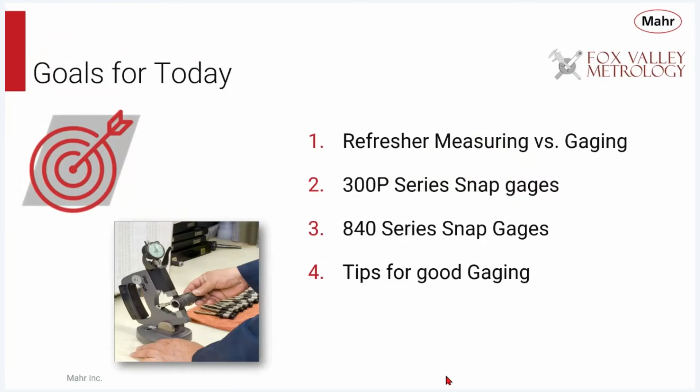So today we're going to have a little refresher about measuring versus gauging, because there is a little difference, and snap gauges are a way of improving your measuring process. And specifically, we're going to talk about the number of different snap gauges that Mahr offers, the 300P series and our 840 series of snap gauges. And then we'll talk about a couple of tips for good gauging.

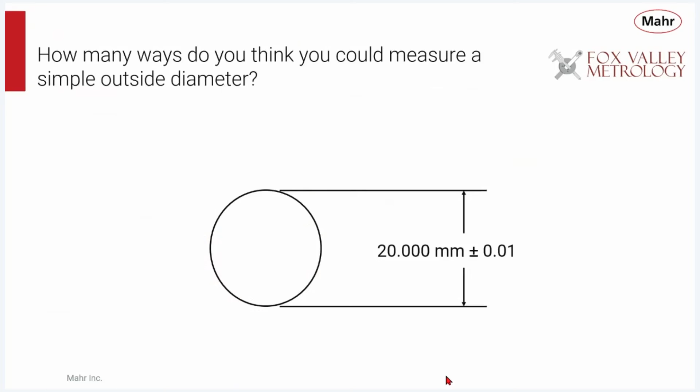Now, when you think about if you have a shaft or a ball, how many ways do you think that you could measure a simple outside diameter? Well, there's probably a ton of them out there. And you can go anywhere from a surface plate with a test indicator, a stand, and a V-block. You can use micrometers or calipers. You might have a special built gauging fixture to do that. You can do it with a snap gauge, a bench ID or OD gauge with adjustable contacts. You can go all the way up to a CMM if you wanted to, or a simple bench stand, probe, and amplifier. Or you can get into a big automatic measuring system to do that.

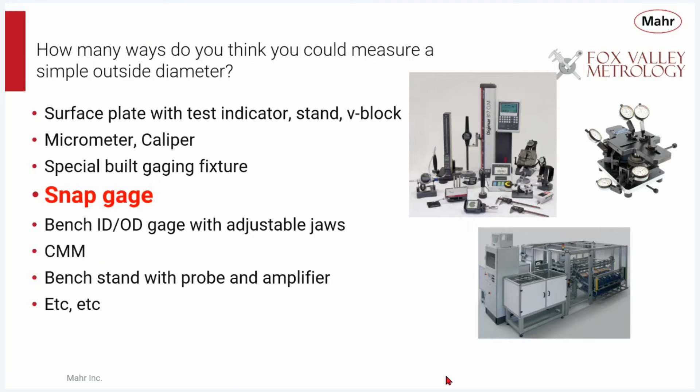But there's lots of different questions that one would ask, and you could probably narrow or funnel your way down to one of these solutions. They're all good, and they're all meant to support a specific application or need. But today we're going to talk about the snap gauge as one of these solutions, because it can be a very viable and useful solution for measuring an OD.

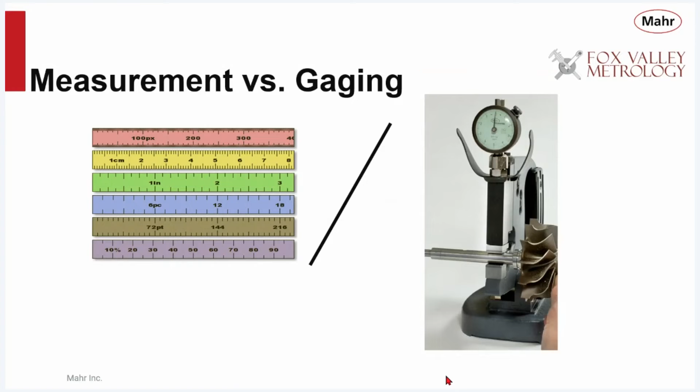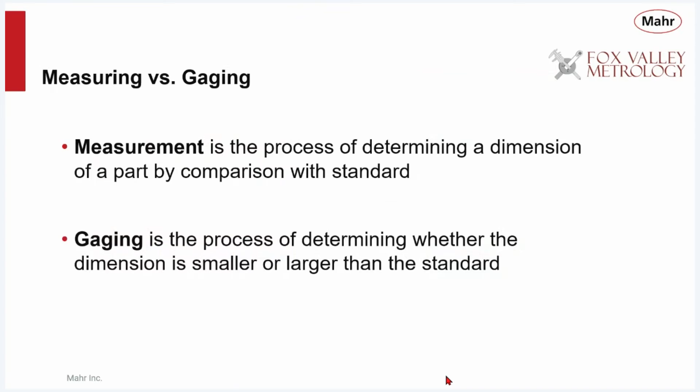Now, myself, just like everybody else, I can say measurement and I can say gauging, and we're kind of saying the same thing, but really there's a difference between those two ways of getting a dimension. So I like to think of measurement as a process of determining a dimension of a part by comparison to a standard, where gauging is the process of determining whether the dimension of the part is larger or smaller than the standard. So there's two different things going on there. One has the reference or the standard built into it, and the other one has the reference or standard external.

So measuring instruments have the standard built into them. Micrometers, scales, and calipers are a system that has the standards built in. They tend to be relatively slow and require more skill for accurate measurements, because you have to align the caliper or align the scale to the part. But with a good operator, you can get some pretty good results. These are variable gauges, or measuring instruments, that have lots of measuring range, lots of versatility, but they tend to be slower and not the most accurate types of measuring instruments out there.

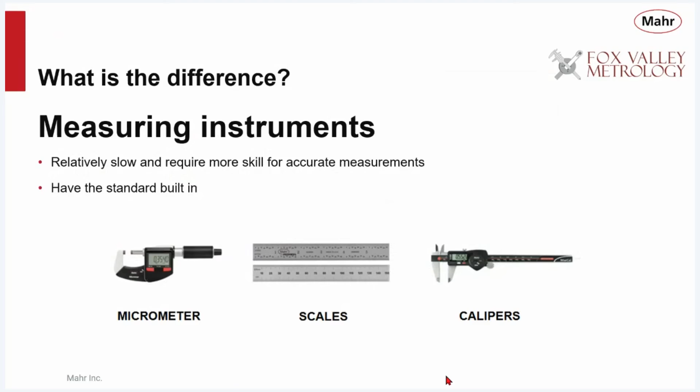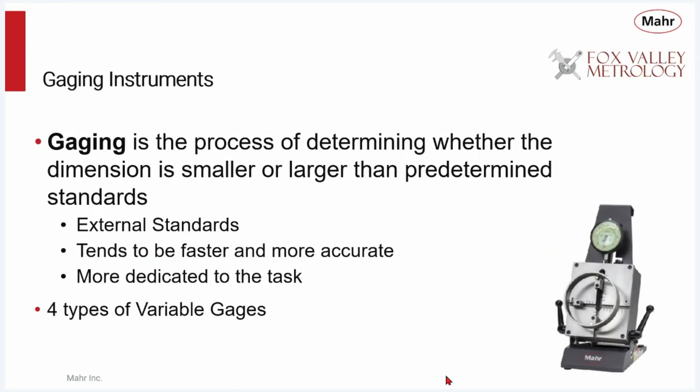Like I said, gauging is the process of determining whether the dimension is smaller or larger than a standard. So these have external standards. They tend to be a lot faster, more accurate, and more dedicated to the task. And there's a subset of variable gauges, and we'll just take a quick look at those.

Fixed gauges, these are made to one dimension. These are our masters, master snap gauges, go/no-go gauges, and so forth. And they just kind of tell you whether the part is good or bad. You don't get any deviations of how good or how bad. You just know that the part is good or bad. There's no information about the part form. It's the fastest process. It's good for one size.

Sometimes there's questions about if you use a little force on that master and make it fit, is that really good or not? So there's some human error with that. It's probably a pretty low initial investment of buying just a master for a part, but you have to maintain that master, store it, get it recertified and so forth, so you can get some added cost over the years. And then usually you'll need two masters, one for the min and one for the max for that size being checked.

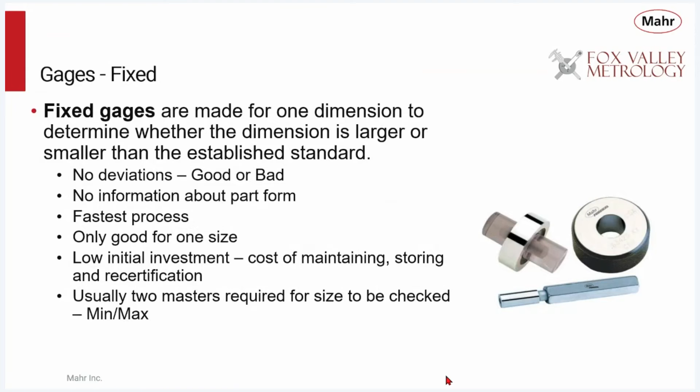But this is what started the Industrial Revolution, these fixed master, fixed gauging systems. Then we move up to adjustable variable gauges, like our adjustable bore gauges and so forth. They can be adjusted to a specific size, but they have a limited measuring range. So now you can actually get and record the actual deviations of the part.

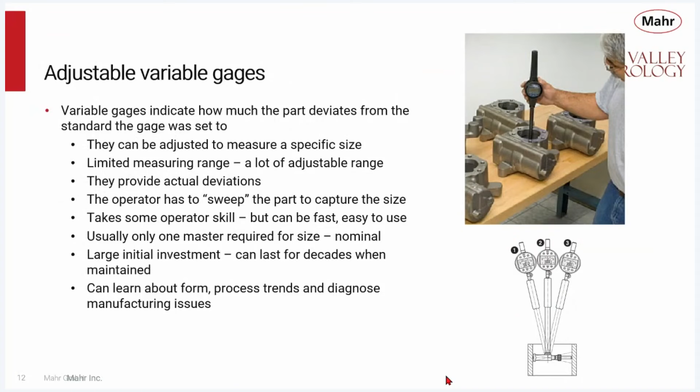But typically, the operator has to sweep the part to capture the size, which takes some operator skill, but with practice and experience, this can be a fast, easy way to measure a whole variety of different parts. You still need a nominal master for each size. It's a little bit larger investment, but these gauges can last for decades when they're maintained. And by using the variable data, you can learn about form, process trends, and diagnose manufacturing issues.

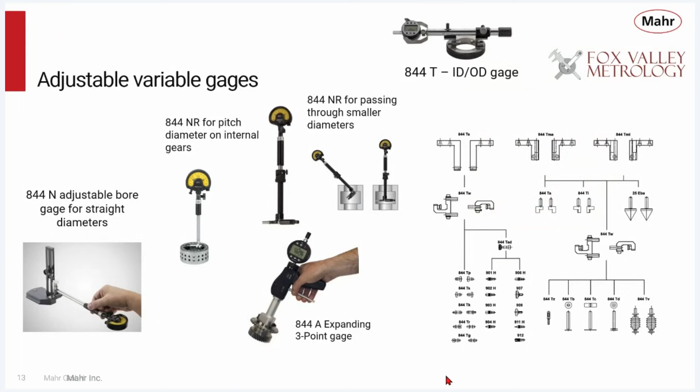And there's a whole family of different types of adjustable variable gauges out there. Adjustable bore gauges, tri-bore gauges, ID/OD measuring gauges. These are all adjustable gauges. You fix them to a specific size, set them against a master, and now we have very limited measuring range to look for the part deviation.

Now you can take that variable gauge and improve it a little bit by adding a backstop to it. So you have an adjustable variable gauge with a reference. These types of gauges with a reference again indicate how much the part deviates from the standard. Again, they're adjusted to a specific size. They incorporate a reference stop to help position or lock the part into a repeatable place for measurement.

Therefore, once you snap that gauge on or lock it in position, it's ready to make that measurement and it'll give you a good repeatable reading. So there's very little operator skill. It's very fast, very easy to use. Again, just like a variable gauge, it has adjustable range, but a very short measuring range, giving you the actual deviations for your process control measurements.

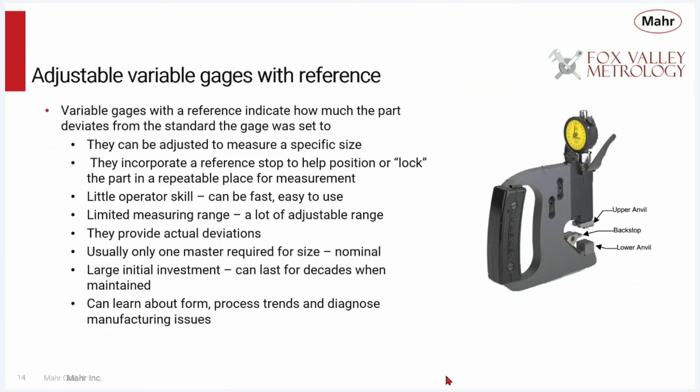You require a master. They're not expensive, but they're an investment that you have to make. And again, using that data, you can learn about the form, process trends, and diagnose manufacturing issues. And there's lots of variable gauges with references. There's snap gauges. There's these bench ID/OD gauges. And any bench stand will also benefit with the use of a backstop for a reference, because it really positions the part in a repeatable position, which greatly improves repeatability of the system.

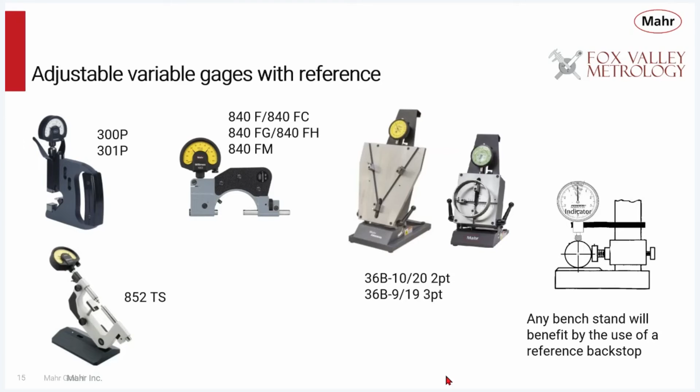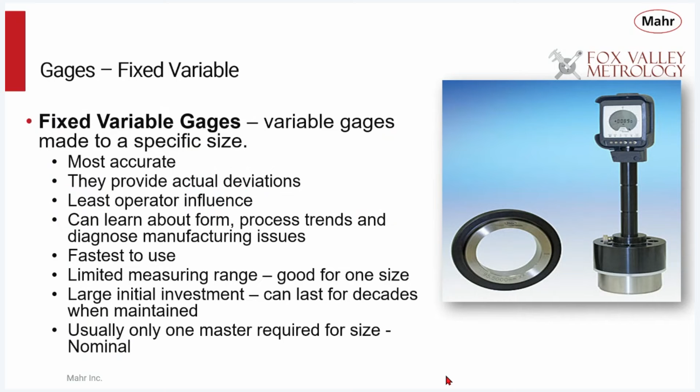But the best type of variable gauge are these fixed variable gauges like air gauging, fixed plug gauging. These are the most accurate. They provide actual deviations, no operator influence. You can learn about the form, process trends, and so forth. They're the fastest and easiest to use with the best performance, but they are limited to one measuring size. So the initial investment is pretty large, but again, these can last a long time, and you need a master for them.

But we're gonna talk today about snap gauges with backstops, and these are variable gauges for most OD applications. They're a step up from other measuring systems, and they're probably the fastest and easiest to use of the variable type gauges. Again, they provide the actual deviations. You can learn about form. They're very easy to use, and I think they're a good value for the investment. For a snap gauge, you need the snap gauge, you need a master, and then you're ready to start making your measurements.

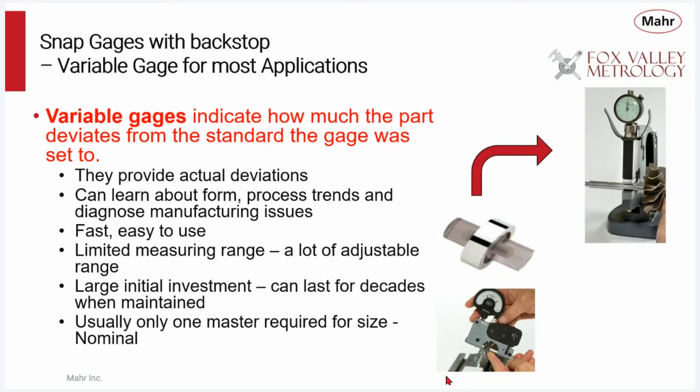With a snap gauge, you set it to a specific size. It's dedicated to that. There's no operator influence. And what do you do? You improve the whole measuring process. Your uncertainty of measurement gets smaller and smaller because you're using a gauge that's more dedicated to the task. So that's the whole purpose of looking at the application, looking at the tolerances, and there's points where you can move along that variable gauge chain to get better performance and value for the gauge. Snap gauges are a step up from normal micrometers out on the shop floor. Faster, easier to use, and better performance.

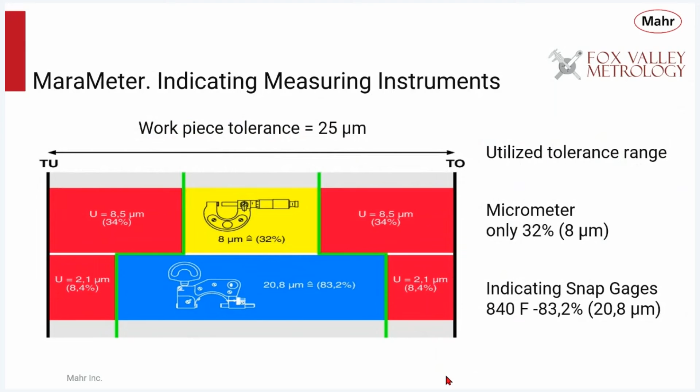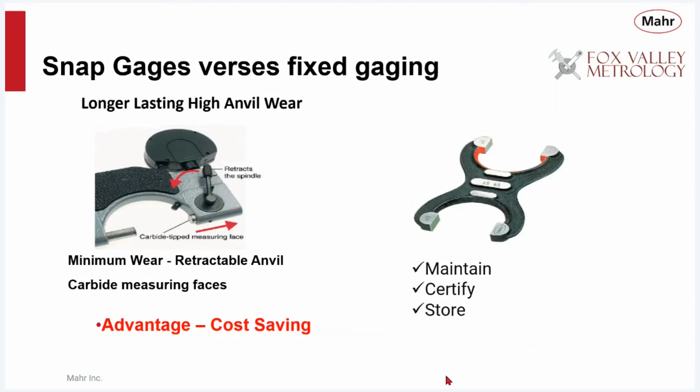Now, Mahr sells a number of different snap gauges.

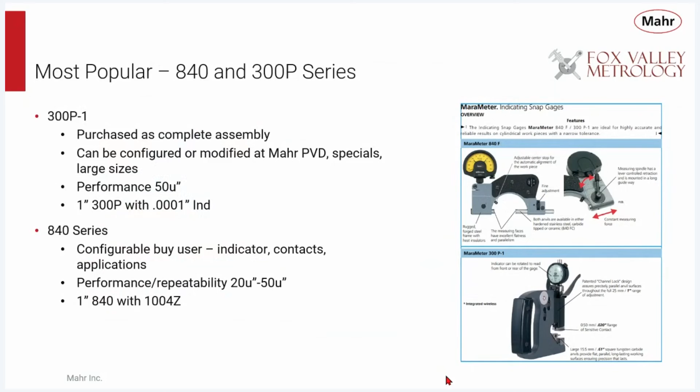Now let's talk about the 300P series for a minute. These have our patented channel lock for anvil parallelism. That's an important part of any snap gauge. You want to make sure that the anvils are parallel, so you don't get any errors by the different size and measuring different areas on the contact. So it's important to have parallel contacts.

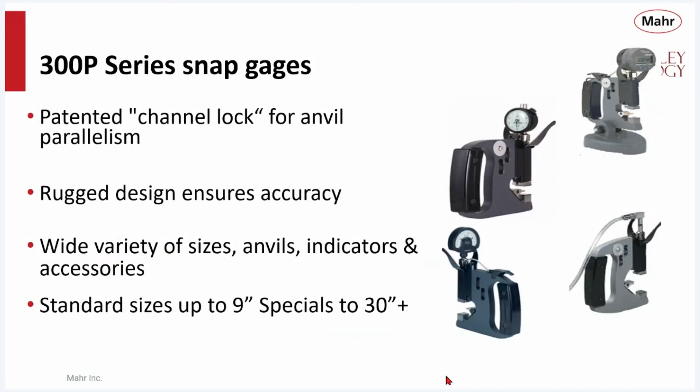These are a very rugged design. Again, these are meant to be used out on the shop floor at the point of manufacture. These come in a variety of sizes, anvils, indicators, and accessories, and standard sizes up to 9 inches, but we've made snap gauges larger than 30 inches if required.

On the 300P series, the lower anvil is an integral part of the frame itself, and the size is set by adjusting the frame itself. The frame part, or the right side of the indicator sensitive contact, all travel as a unit within the channel lock. So as that's moved up and down, and then drawn back into the channel lock, it realigns itself, and we maintain the parallelism.

The anvils are wider than the frame, so we have a large contact area, which helps in reducing wear. It has a big reference anvil in the back, so it can really snap onto the part when we're making measurements. And with all gauges, you want to have some type of heat insulation so that the user doesn't influence the measuring process.

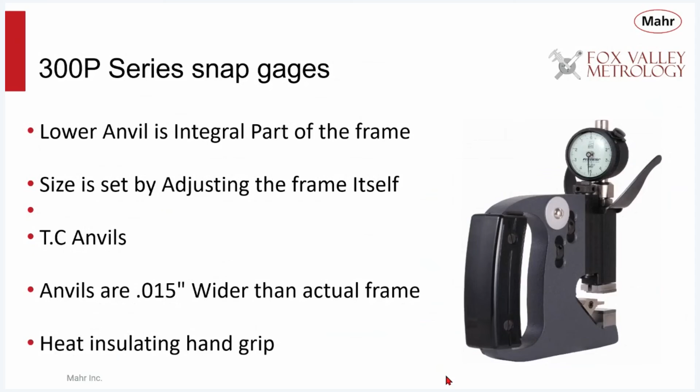And just take a quick look at what a snap gauge consists of. You have a frame. Most gauges look like a C, the letter C. They have a reference contact, a backstop, and a measuring or sensitive contact forming the C. If you look at any gauges, as long as you have those three parts, you're going to have a pretty good measuring system.

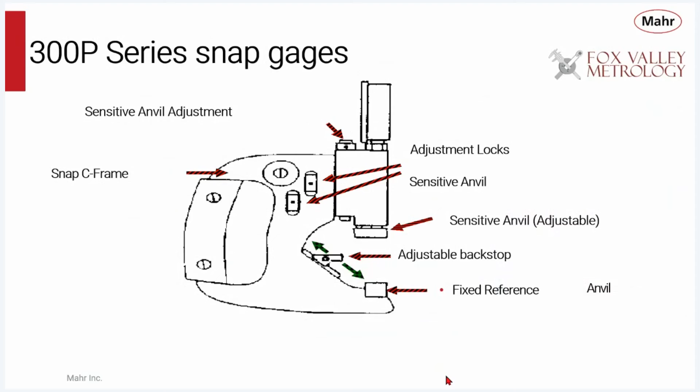But there are adjustments on the snap gauge for moving the sensitive contact up and down, locking it in position. You have an adjustable reference backstop, and you have a fixed reference, which is your measuring anvil. All these anvils are carbide for long wear, again, meant to be used hundreds of thousands of times measuring a part.

These snap gauges can come with dial indicators, digital comparators, digital indicators. We make large special ones, as I noted. So all these gauges are fully adjustable with positive positioning for locking at any point within its measuring range. The sensitive contact has a travel of about 20 thousandths. So most tolerances for this type of gauge are much less than that.

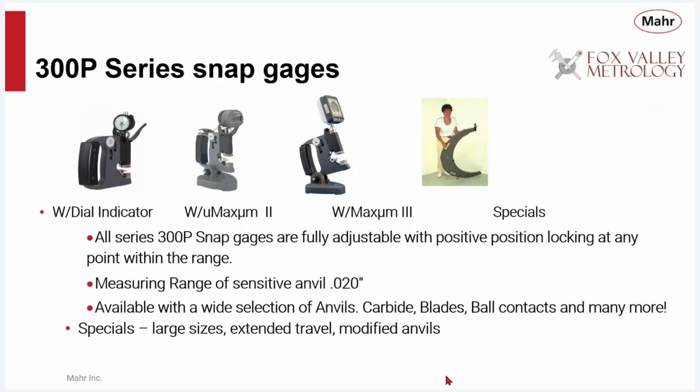And we can get a whole wide selection of anvils, carbide, blade, ball contacts, and more. And specials can include larger sizes, extended travel, and modified anvils.

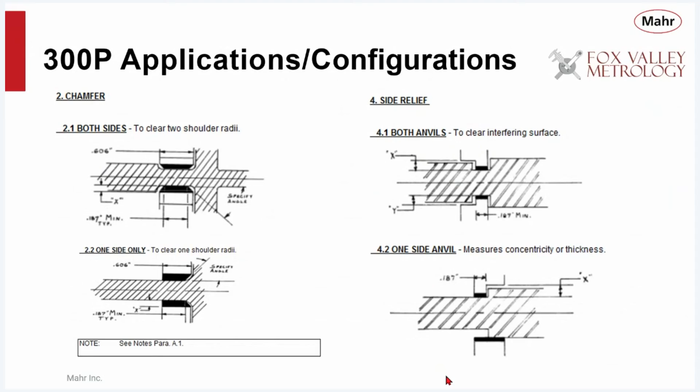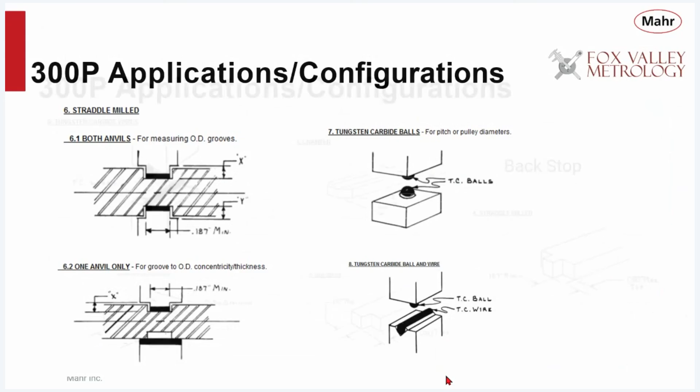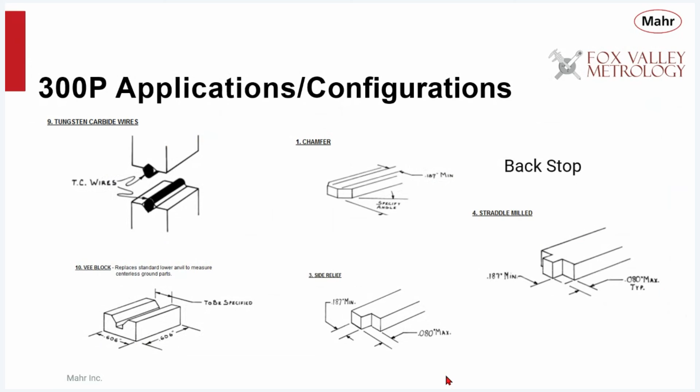We can make narrow anvils. We could put ball contacts. We can make ball or line contacts like cylinder contacts or two-cylinder contacts for doing pitch diameters on certain types of gears and so forth. So lots of capabilities of making custom snap gauges for an application. There's our carbide wires on the left side there. We have special backstops sometimes to align the part. Again, all configurable things from Mahr.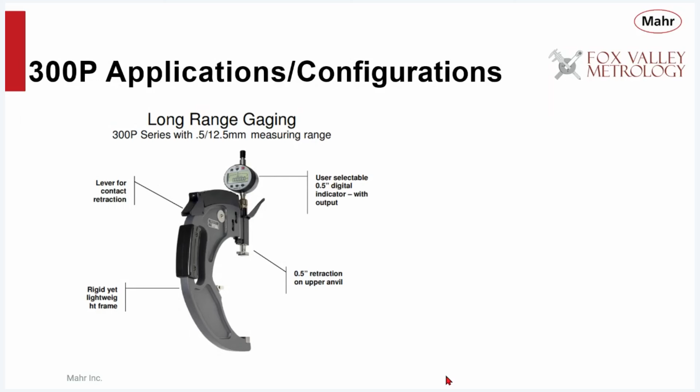We even have snap gauges that have extended range. So if your part has larger tolerances and you want to measure within a half-inch measuring range, we can make snap gauges that have a half-inch retraction, and you can measure anywhere within that half-inch range once the gauge is set to its specific size.

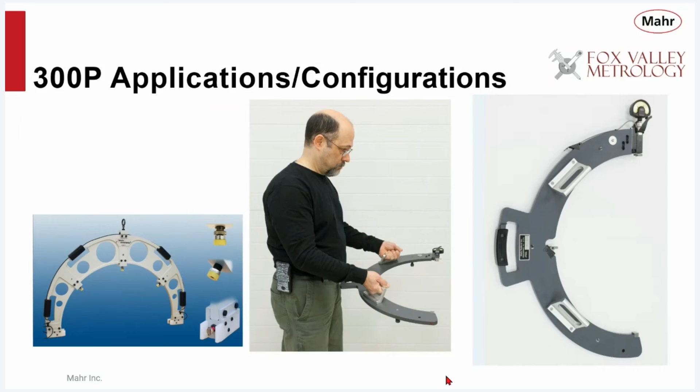And here's an example of some of the larger ones we've done where you can basically get up to 30, 40 inches with a snap gauge. They can be electronic, allowing for large diameter shafts to be measured, or they can be of more portable size with handles to make them easier to use.

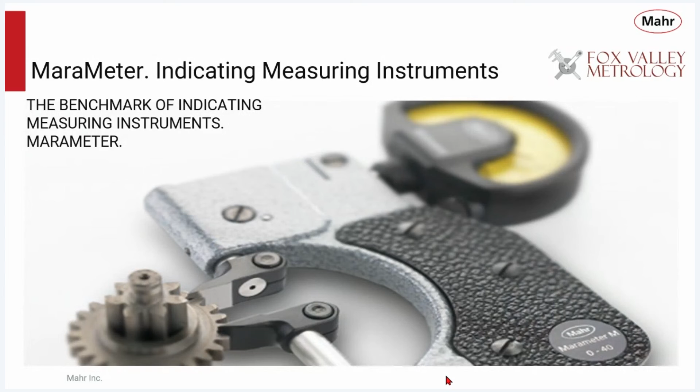So let's take a look at the 840 series. These are the little higher precision snap gauges, and these come in a couple of different series. These are rugged forged steel frames with heat insulators. The measuring spindle is mounted on a long guideway with a lever-controlled retraction. So these have retraction built into them. The anvil spindle or the reference anvil can easily be adjusted with a fine adjustment screw, and these use a constant measuring force because the built-in spring eliminates any user influence.

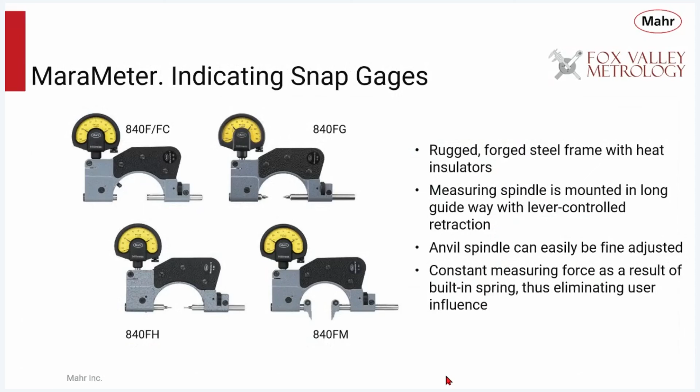So you can see there's 4 different models here being used with dial comparators. And I think dial comparators are a lost art. In terms of comparators, they provide short range but very high resolution, which is a perfect match for a snap gauge. Again, we have lots of variable range but very limited measuring range. So very often people will put a half-inch digital indicator or dial indicator on a gauge like this, when really you only need a couple of thousandths of measuring range within your indicator, and now you can get a higher resolution.

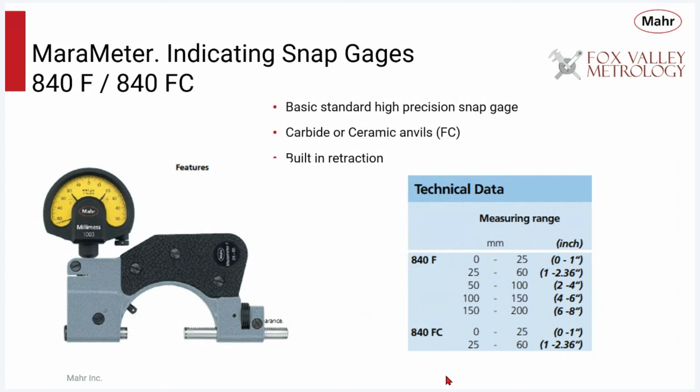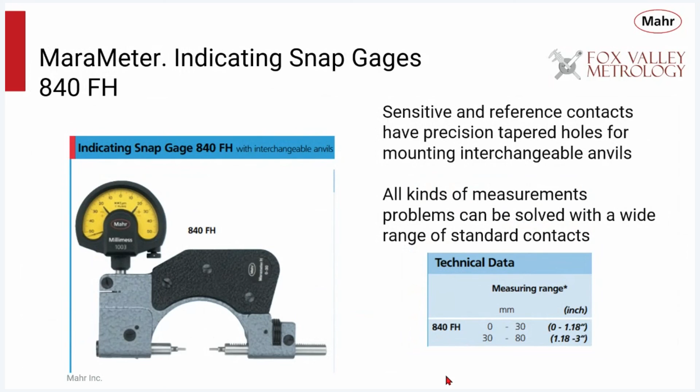And then there's different variations of that. Just like the 300p had different anvils, the 840 series has interchangeable contacts. So you can get some very small anvils. These have a tapered hole in there that mounts these interchangeable anvils, and you can get different sizes, lengths, and so forth, where all kinds of measuring problems can be solved with a standard range of contacts.

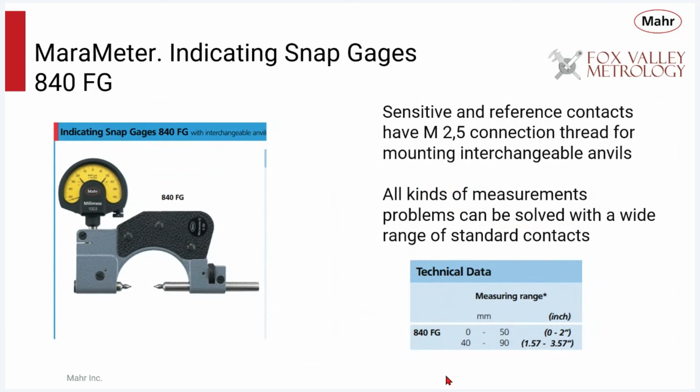Another type of 840 is one that has a screw-in contact. So these have a metric 2.5 connection thread for mounting interchangeable contacts. And again, in this type of gauge, you can use ball contacts or point contacts or special contacts for doing threads and so forth. And you can now make this into a thread measuring system, doing pitch diameters or over thread dimensions.

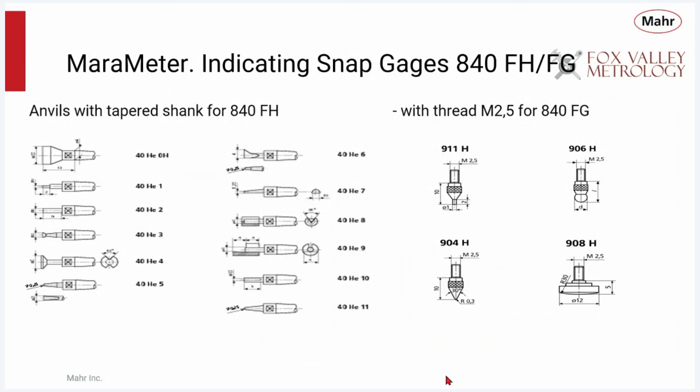And here's just an example of the type of different contacts that you can get. You can get flat contacts, ball contacts, blade contacts, offset contacts. A whole family of different contacts are available to measure grooves or lands or different parts on the OD of maybe a shaft or any part that you have.

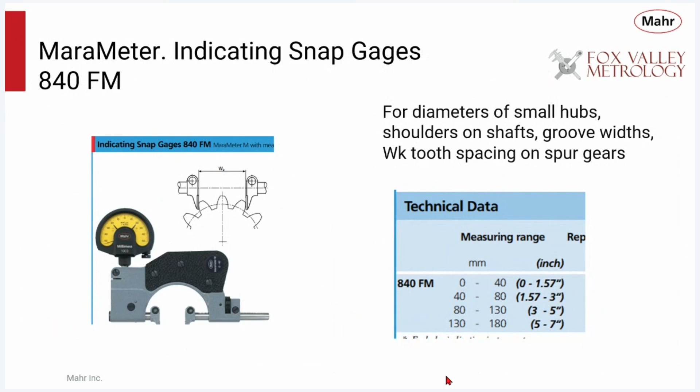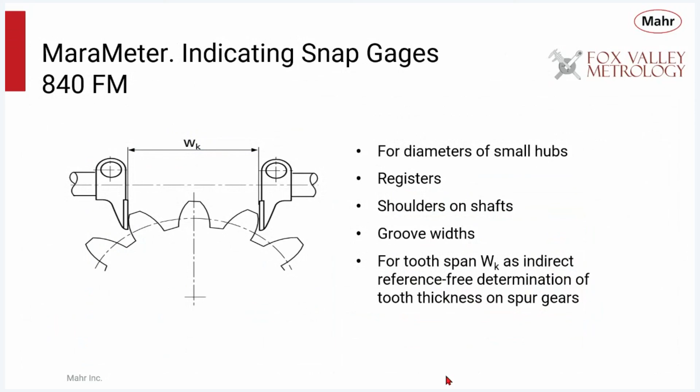We also make a snap gauge that measures the tooth spacing on spur gears. This is very popular in the gear industry, and another application using different contacts on the standard 840 frame to allow you to measure the spacing of gear teeth. So basically what this measures, this is the WK format of measuring tooth spacing. It's for diameters of small hubs, shoulders on shafts, groove widths. This WK is an indirect, reference-free determination of tooth thickness on spur gears.

We also have a bench-mounted snap gauge, our 852 series, and this is again a snap gauge that's mounted to a base. It has the adjustable anvil in the back, a reference anvil that's adjustable to various sizes. So this is a very nice gauge when you don't want to bring the gauge to the part, but you want to bring the part to the gauge. So this is ideal for smaller parts where there might be hundreds of parts to be measured.

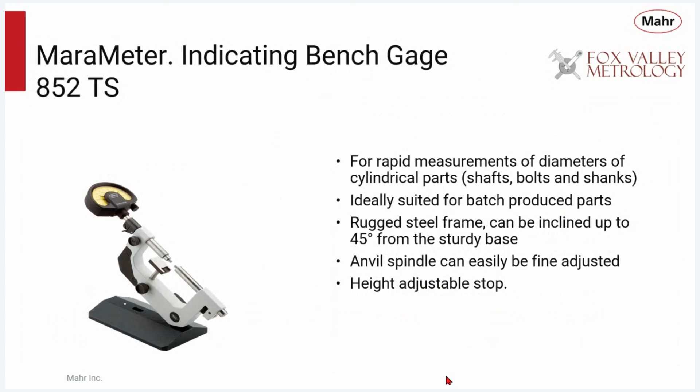It's very easy to bring that part to the gauge, snap it in position. It does have a retractable contact. It's easily adjusted. You can adjust the angle for use. And it's a nice bench gauge for very small, sensitive parts to measure.

And we can also do custom applications, taking the 840F, adjusting or adding special indicators, special contacts, measuring, in this case, a pitch diameter here. Again, you can contact Mahr, and we have the application support to help you with your snap gauges.

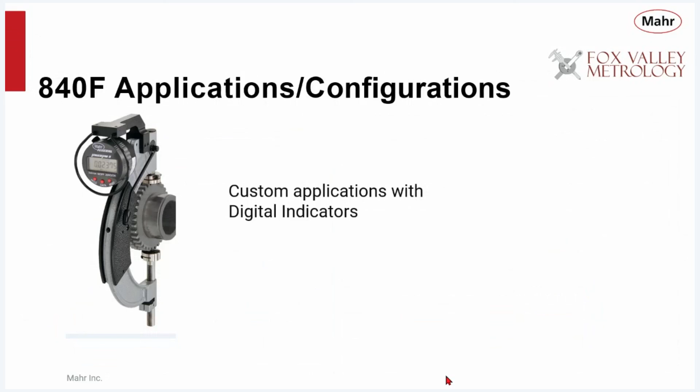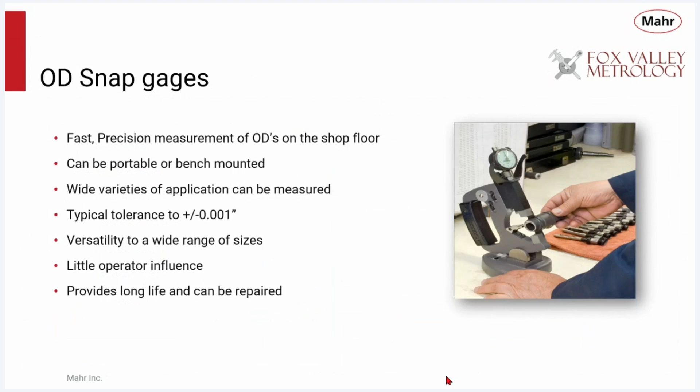So, like I mentioned, snap gauges are a fast precision measurement of ODs on the shop floor. They can be portable or bench mounted, wide variety of applications. Typical tolerances are plus or minus 1,000th or better. They're versatile for a wide range of sizes. The nice thing about these variable snap gauges with the fixed reference is that there's very little operator influence, and they provide long life. We've seen these gauges last 30, 40 years. They come back for a new set of anvils, and they're ready to go again.

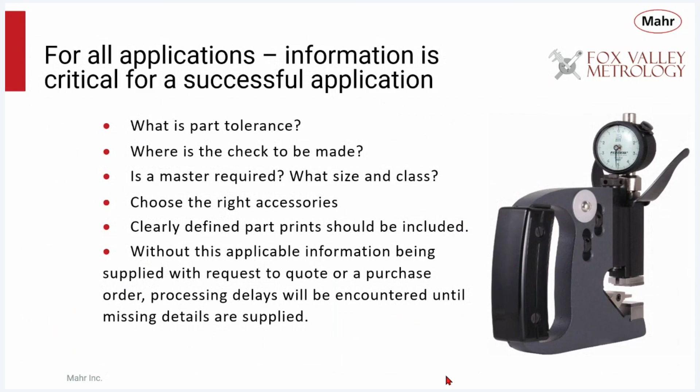But these gauges are just like any other gauging system that's out there. You have to ask some questions of what am I going to do? So we're always going to ask, as part of the selection, what's the part tolerance? Where is that check going to be made? What master do we want and the class that goes along with it? We're going to help you choose the right accessories. It's always good to have a clearly defined part print with the application. Without that information, we could have some delays, but it's important to provide the right information as part of any request.

How do you make that measurement better? Well, during the day, these gauges are very stable, but it's always a good practice to verify the zero or the master position during the process, whether it be on an hourly basis or maybe every half hour. Just put that master back in there to verify that nothing has shifted during the operation. It's especially critical as the tolerances get tighter. It's good to verify the zero location.

It's always good, when you're working on the shop floor, to keep the master, the workpiece, and the gauge at the same temperature. Try to keep everything, because they are comparative gauges. If everything's at the same temperature, there could be changes in temperature, but because they are comparing everything at the same materials and so forth, you don't have to worry that much about temperature variation.

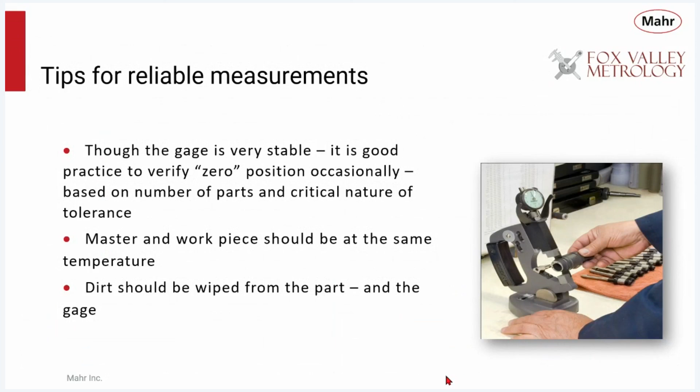And dirt is probably up there in terms of environmental issues, being the enemy of precision measurement. Wipe the dirt from the part, keep the gauge clean, keep the environment clean, keep your fingers clean. That will go a long way for making reliable measurements.

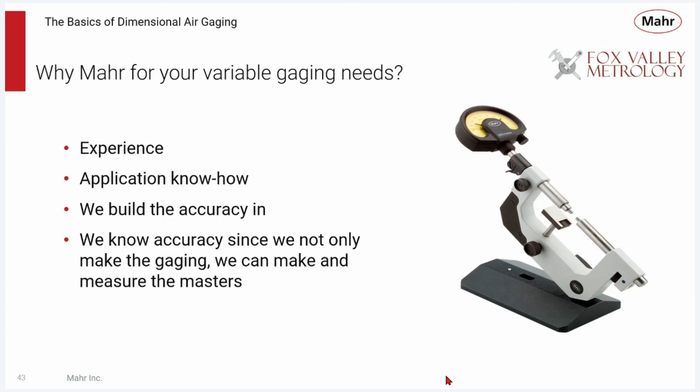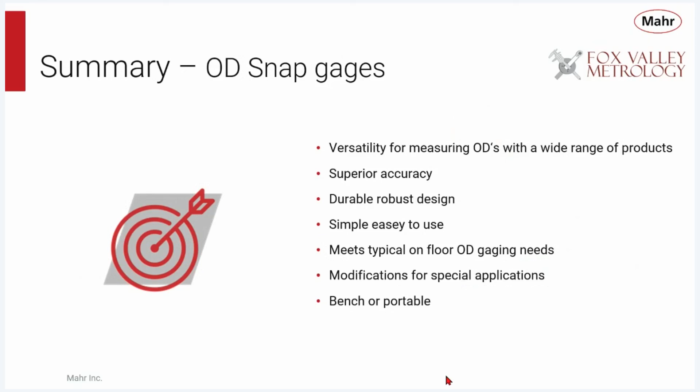So in summary, we talked about the versatility of measuring OD with a wide range of different products. Snap gauges are an excellent way of doing that because of their superior accuracy. They're durable, they have a robust design, they're simple and easy to use, they meet all those typical shop floor OD gauging needs. Modifications are available for special applications, and snap gauges can be a bench or a portable type of application.